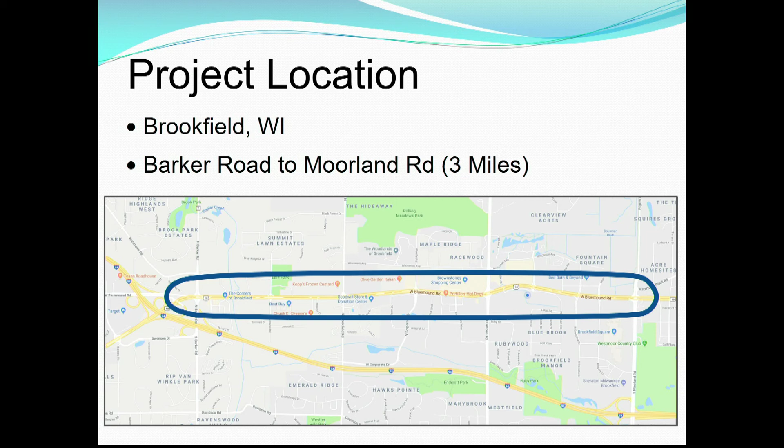So as we look here, it's a 3-mile long corridor from Moorland Road on the far east to Barker Road on the west. A couple of different highlights. It's a 6-lane arterial plus an auxiliary lane, so a pretty wide typical section throughout. It parallels I-94. I-94 is just to the south, so if there's any issues on the freeway, Bluemound gets all that much more traffic.

It's intense retail and office land use. You've got a regional mall that's right down here. This area right here has about 1 million square feet of office, and the entire corridor just has a lot of office, multiple business parks all up and down there. For the most part, as businesses go in and out, they don't stay vacant very long. It has always been a high demand location. As I mentioned before, known statewide for both safety and operational issues.

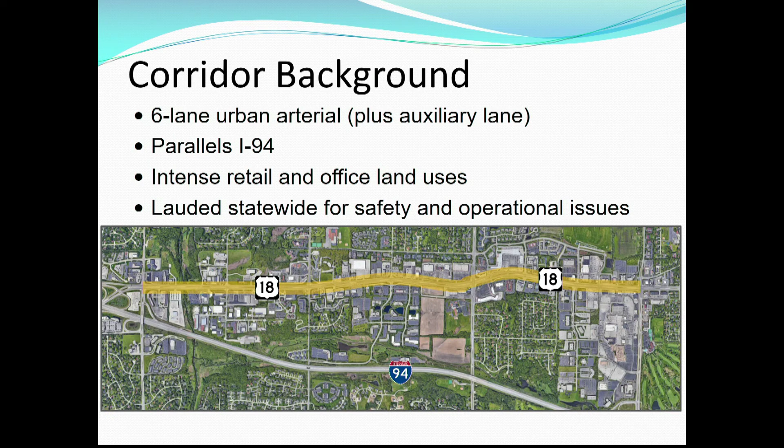10 traffic signals along the 3-mile stretch. Overall, and this was at the time of the project, 2008-ish, a lot of it had very good signal spacing. You can see down the far west end, not ideal spacing. And then a couple in this location on the east end as well, where the spacing is a little bit tighter and tended to impact operations.

Mid-30s to low 40 thousand vehicles per day, and that stayed consistent before and after the project. And it's fairly important because the project occurred in 2008, right before the recession. Volumes along the stretch of roadway, again, a high commercial location, stayed relatively constant, which is important when we looked at the crash rate aspect. Posted speed of 45 miles per hour.

My office is along here. So in the morning when I'm going to work relatively early, there's not as much traffic because the retail is pretty quiet. Traffic is going along at 50, 55 miles an hour. In the evening, when traffic rises back up, then it drops considerably more. During the peak hours, you're going maybe 35, 40 miles an hour, somewhere in there.

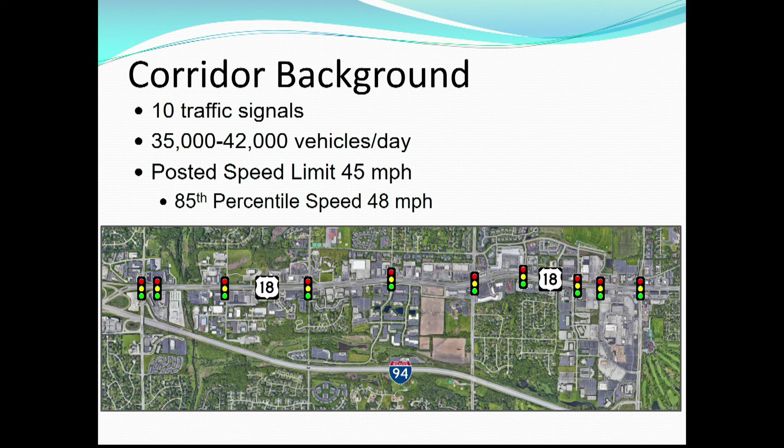The historian has a number of photos along the corridor. So this was circa 1962. I believe it was the first 4-lane divided roadway in the state. In the 1920s, Bluemound Road was divided and paved. It was the main corridor that went from Milwaukee to the Blue Mounds.

It was supposed to go to the Mississippi, but didn't make it. But it went to Madison. And because it went to Madison, that meant that we had senators that would drive from Madison to Milwaukee. And so it was one of the first paved roads that we got. We know where that money came from.

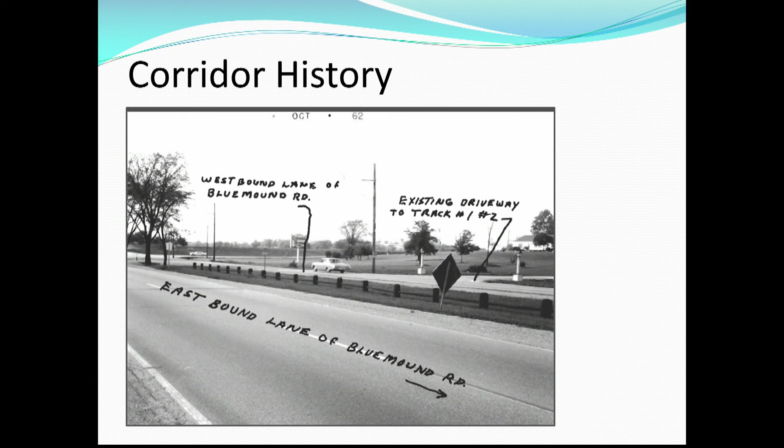Even in these older pictures, the access, existing driveways, they're noted. There's a lot of different photos where the access locations were noted. And while much of the corridor has changed and evolved, some of it stays exactly the same, kind of a local tavern there.

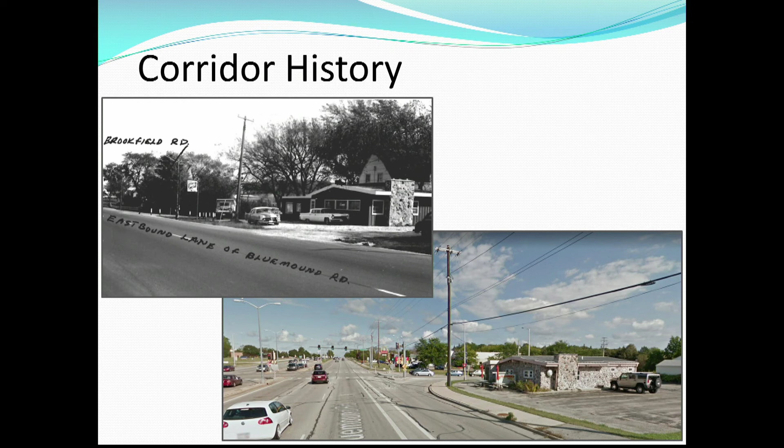Now, one of the things I was amazed at, though, is looking at the car pictures and pulling up the license plates. Both that car right there and this one here are registered to Mike Roach. I just want you to know I didn't actually take that picture.

In preparation for the project, DOT applied for hazard elimination safety funding, the precursor to HSIP. It was originally done to look at some of the signal modifications along the corridor. It was then expanded to include the median modifications, which really became more of the element that we're going to talk more about today.

So to look at the objectives of this project as a whole: to improve the corridor safety through those median modifications, enhance and improve the intersection safety through some, I'd say, relatively minor modifications. This definitely wasn't a wholesale reconstruction of the corridor or resurfacing. It was just looking at median openings and a few minor intersection changes, which we'll go through. And then secondary was how are these modifications going to enhance the overall operations of the corridor itself?

So when we look at the corridor, the existing crash rate prior to the project, so mid-2000s, the corridor crash rate was 230% higher than the statewide average for urban arterials. 2 of the signalized intersections were deemed the most dangerous intersections in Wisconsin by State Farm Insurance. They actually nicknamed this corridor Blood Alley. They had that in the newspaper in the early 70s.

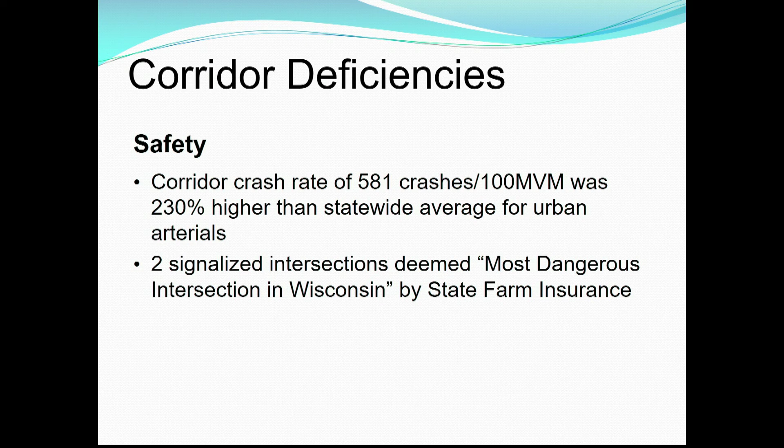So some of the issues along the corridor, this 3-mile stretch: we had 17 unrestricted or full access median openings. Basically anyone's able to come in and out, making left turns. And as Christine mentioned, very similar to what you'd find on a 6-lane, high-speed, high-volume facility, during the peak hours there weren't a lot of people making those lefts out from the businesses. A lot of people were redirecting.

Yes? Is it an access control road? It actually is. This is a state Wisconsin 84.25 controlled access highway. And I think we did this one in about 1951. This is one of our first.

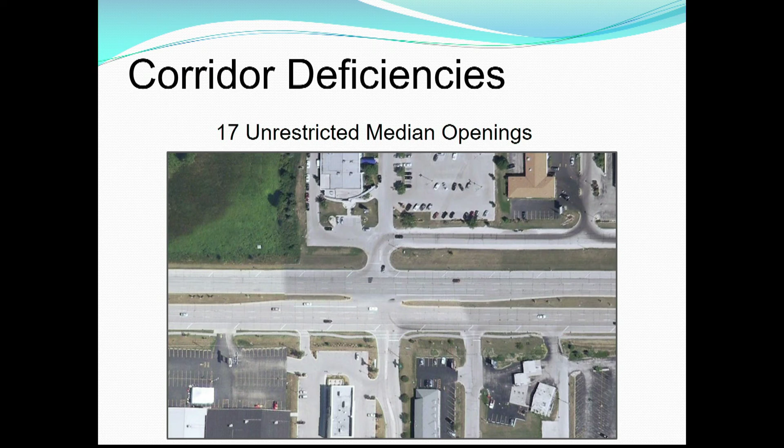At the signalized intersections, the right turn lanes had a very flat angle. This one shows going into an auxiliary lane. Most of them were yield conditions going into a through travel lane. It's such a flat angle, so a lot of rear end crashes where the motorist has to look back far over their shoulder, start to go, stop, and someone behind them rear ends into them. So that was another deficiency that was identified.

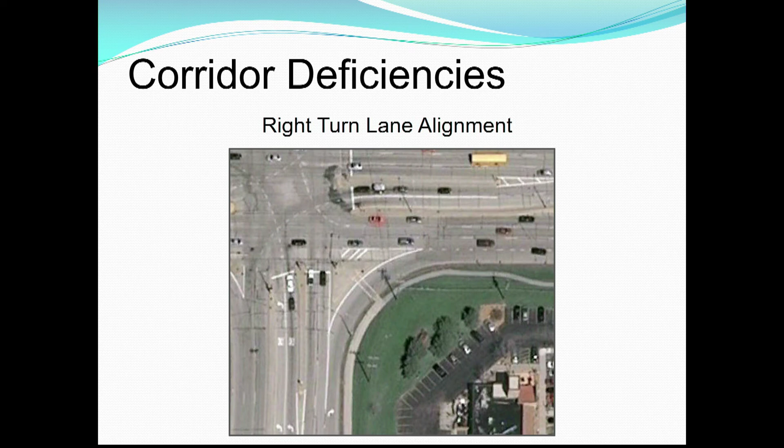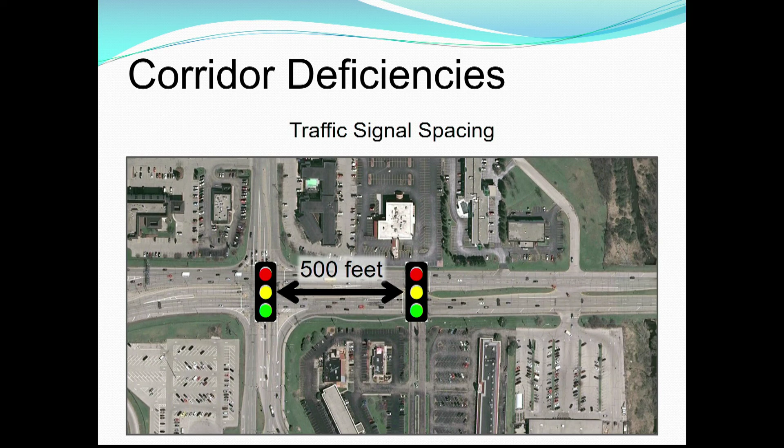There was also a number of decision points that were going on immediately west of Barker Road. You can just see the gore area here where Bluemound split off from Moreland. So basically the splitting of two arterials. Just a little bit further to the west is an on-ramp for I-94 to go westbound. So you had some crazy lane utilizations westbound coming into Barker Road in this original signal at, is that a public street or is that just Marcus? Marcus Drive. So it was not uncommon for traffic to back up several hundred feet, quarter mile east of Barker Road.

So some of the other challenges that the project had is Wisconsin at the time was one of 2 states that didn't allow U-turns at signalized intersections. All of our neighboring states did. So if you were in Illinois and you crossed the border, and most of them weren't signed, you'd come up, you'd make a U-turn. If you were unlucky enough to do that in front of your friendly police officer, they would pull you over and you might be able to talk your way out of it. But it obviously created an issue from a continuity standpoint, from a consistency standpoint. But from an access management standpoint, if you're not able to make U-turns at signalized intersections, it really challenges some of your opportunities to make median modifications.

And then there's the typical local business acceptance of the median modifications and the closing of those and how you're going to go through that. Involved extensive public interaction. And then the political will to implement. This is one of those projects that had been looked at and evaluated for easily 20 years before this was implemented in terms of, okay, how can we do this? Can we close these median openings? What can be done here? All sorts of analysis, crash studies, operational analysis. Everything showed that it would work better, it would be safer. But getting over that hurdle to actually implement it was very challenging.

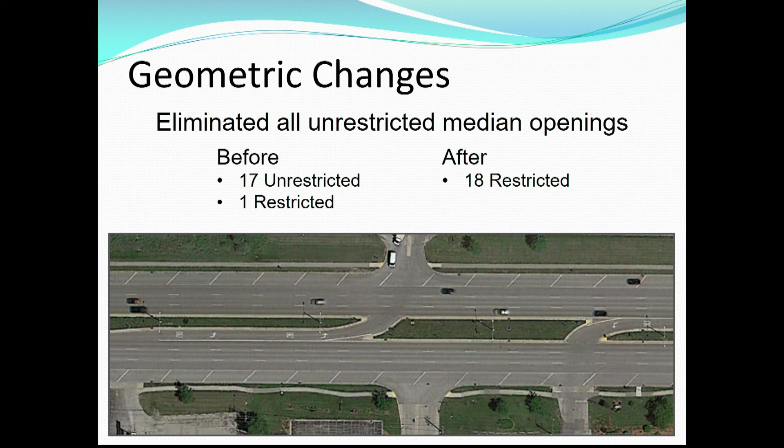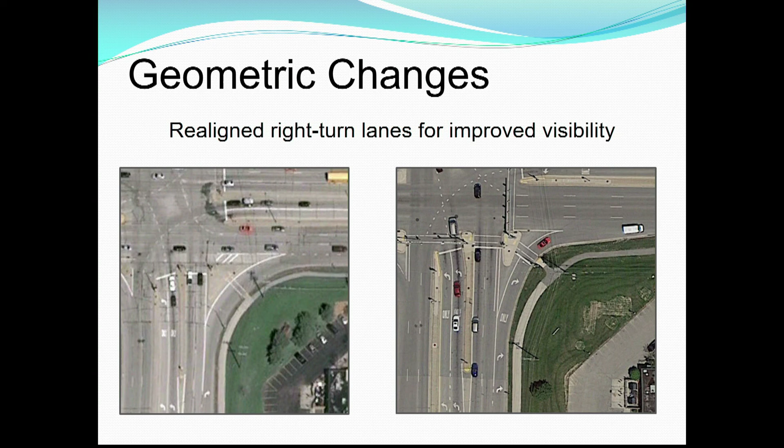The actual project implementation and what was done: taking those 17 unrestricted full access median openings and converting them all to directional left-ins. So along the corridor, we either had a signalized intersection, right-in, right-out driveways, or right-in, right-out, left-in driveways. There are no longer any full access driveways along the entire 3-mile stretch. The right turn lanes were flattened or sharpened up, so coming in at close to a 90-degree angle. A number of signal modifications were done. Along with those right turns, most of the intersections were yield condition, converted to signalized for the right turn movements.

And this is critical from the safety standpoint also: the left turn movements were a mix of protected and permitted. So you could either turn on the green arrow or the green ball, and some were protected only. The entire corridor was converted to protected only. So the only way you could turn left at a signalized intersection was going to be on a green arrow. This made sense independent of the access changes that we were doing. You had a high-speed, 6-lane facility with a tremendous amount of traffic and a history of angle crashes at the signalized intersections already. But now, eliminating those median openings and putting more traffic at those intersections made even more sense.

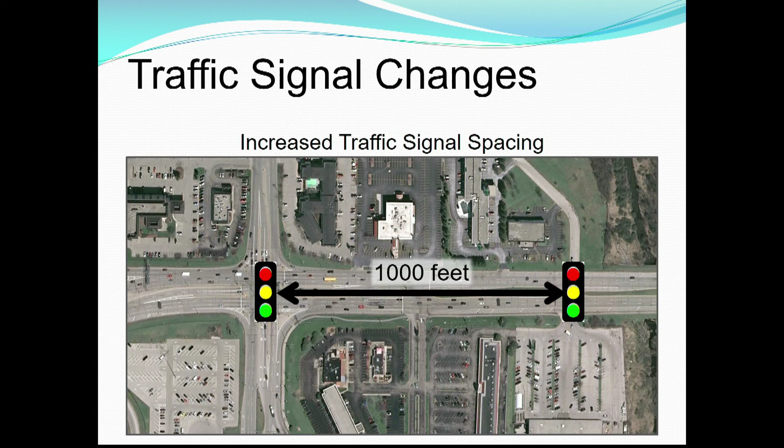We also were able to address the tight intersection spacing on the far west end, increase that from 500 feet to 1,000 feet, so doubled it. It's still one of those locations, though, when you drive through it, it's like, wow, that is still really tight spacing. It improved it dramatically, but because of the lane utilization issues for the decisions past here, traffic still regularly backs up well before that other signal. It's definitely better, but there's still issues that hopefully can be addressed long-term with some interchange modifications later on.

So the safety assessment: the project was completed in 2008. So the before data, 2005 to 2007, after data, 2009 to 2011. As I mentioned before, the traffic volume stayed relatively consistent or actually increased along the corridor during this time period.

So we looked at the overall crashes along the corridor, starting with mid-block. Showed a 73% reduction in the crashes between the signalized intersections. Makes sense we would see a significant reduction in those crashes when you eliminate the left-outs. I think that the magnitude of a 73% reduction was perhaps a little bit greater than we expected, but still not unexpected, perhaps. At the intersections, the signalized intersections themselves saw a 21% reduction in the overall crashes.

And again, the new U-turn law went into effect January 2010. So U-turns were allowed at signals for 2 of the 3 years of the crash data. So even with that additional U-turn traffic and just more traffic going through those intersections, we were able to see a 21% reduction. And then overall for the entire corridor, 35% reduction.

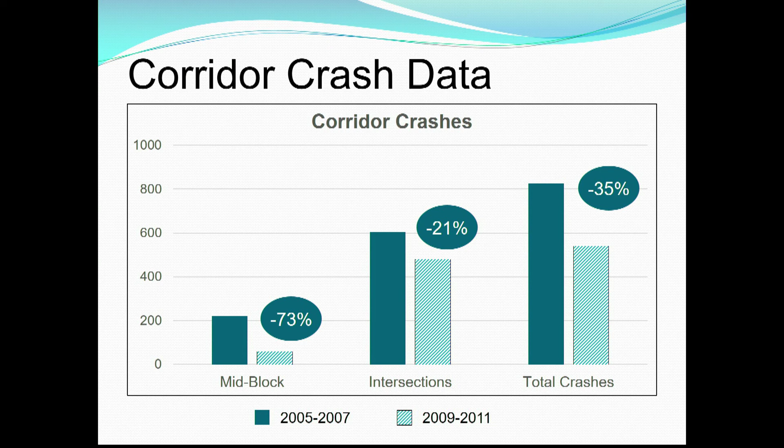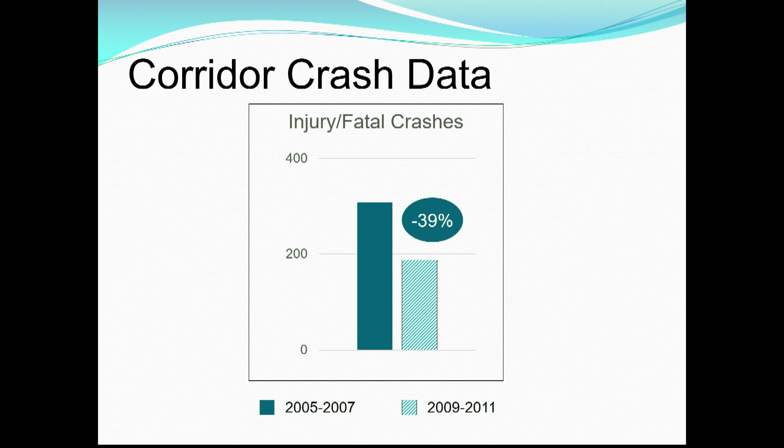A little differently for the injury and fatality crashes, almost a 40% reduction along the corridor. And similarly with the corridor crash rate, 38% reduction.

Some of the other positive outcomes, the feedback that we received was generally favorable. As mentioned, my office is along there, and just being a transportation professional in the area, people always comment on Bluemound Road to you. You always get feedback, particularly when they know you work along there. And the vast majority of people that we heard as the motoring public were generally in favor of it.

Being kind of the corridor transportation person, you walk into a local business and often would ask them, how are things going with it? And again, overall, you get a favorable response in terms of, well, it's a little different. You got to change how people are kind of coming in and out, but sure seems to flow a lot smoother.

The corridor continues to be a major draw for development and redevelopment. Just in the last number of years, the mall continues to add outlots. It's going through a major redevelopment on the southern end. The city, Brookfield, is investing in a kind of a mini convention center. There's a new, we call it a regional mall, but a large-scale retail development on the west end, and throughout the corridor continues to be a very high-value location.

And probably the biggest thing is the success of the Bluemound Road project, along with the U-turn law changes, really was kind of a defining moment in terms of being able to implement projects like this and the median modifications and restrictions at other state highways. Before that, modifying a median or doing restrictions for lefts in was something you'd do occasionally, but not that common. Now, it's fairly common for us to be implementing that on a lot of different corridors.